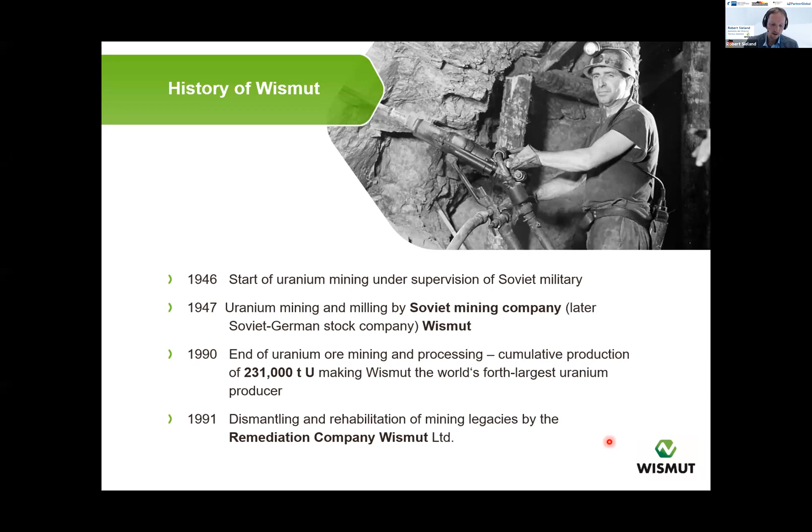Wismut produced in total 231,000 tons of uranium, which made Wismut the fourth largest uranium producer in the world. Starting in 1991, dismantling and rehabilitation of the mining legacies was carried out by the present-day remediation company Wismut. More than 40 years of mining and milling of predominantly low-grade ore affected an area of approximately 100 square kilometers in the eastern part of Germany.

And what was the price for that? The landscapes were devastated, the environment was polluted, and the infrastructure was damaged. You can see on these pictures the situation in 1991. There were altogether 5 underground mines, 1 huge open pit, and an operational area together totaling 3,700 hectares.

Beside this, more than 300 million cubic meters of waste rock from the underground mine activity was dumped on 48 waste rock dumps. The uranium ore was milled and processed in 2 large processing plants on an additional area of 75 hectares. The residuals of the processing step were disposed of in large tailings ponds. We have 7 large tailings ponds on an entire area of 570 hectares, containing about 160 million tons of radioactive contaminated sludge material.

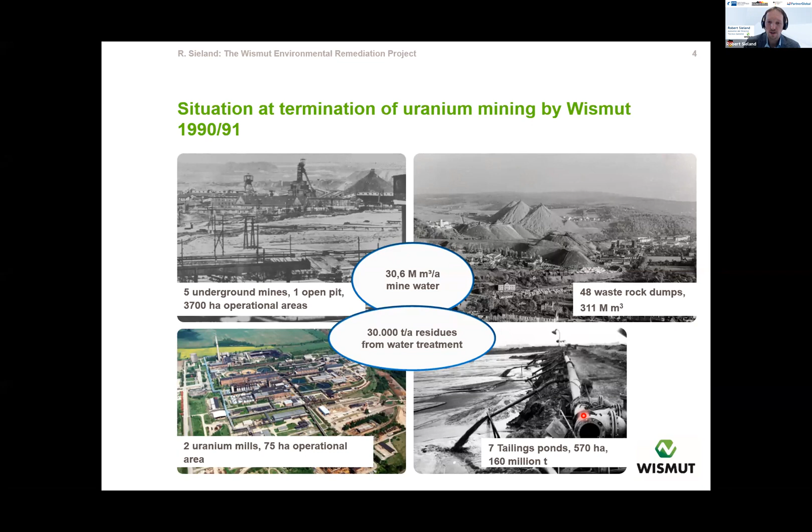In addition to these physical devastations, we had to manage about 30.6 million cubic meters of contaminated mine water each year. And from this resulted 30,000 tons of residues from the water treatment, which we had to manage.

Beside the mining sites, there were the 2 former processing plants, which are under decommission today.

So what were the main remediation goals? The first was to ensure the public safety, especially with regard to the physical and chemical stability of all remaining structures and objects.

Additionally, we need to enable a future land use after remediation, for example, for agriculture, forestry, or even for business settlements.

Very important from the environmental perspective was the aim to minimize the radiation risks and hazards, which are mainly caused by uranium, but also by radium and radon gas. We need to achieve an individual effective dose for the public of less than 1 millisievert per year. This is the reference level and also the remediation goal.

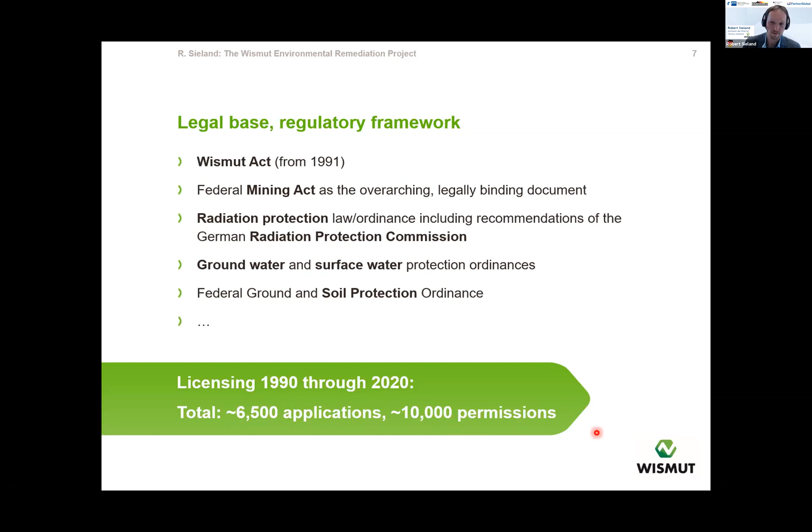Let me come to the main remedial activities after the closure of uranium mining in 1991. It comprised the full scope of remediation, among others, the dismantling of surface structures and buildings, the removal of contaminated material and the safe disposal, then the safekeeping of wastes and residues such as tailings. You can see here a picture of a tailing pond and waste rock dumps, for example, here.

A very big challenge was the refilling of the former open pit. We will hear more details from my colleague Ulf Barnekow in the next presentation. And last but not least, the flooding of underground mines was a very big challenge.

All these tasks above belong to the physical remediation activities, and all these will be finished by 2028. However, there are some additional tasks, such as water treatment, the treatment and disposal of residues, and the environmental monitoring, which belong to long-term tasks. All these tasks last at least until 2050.

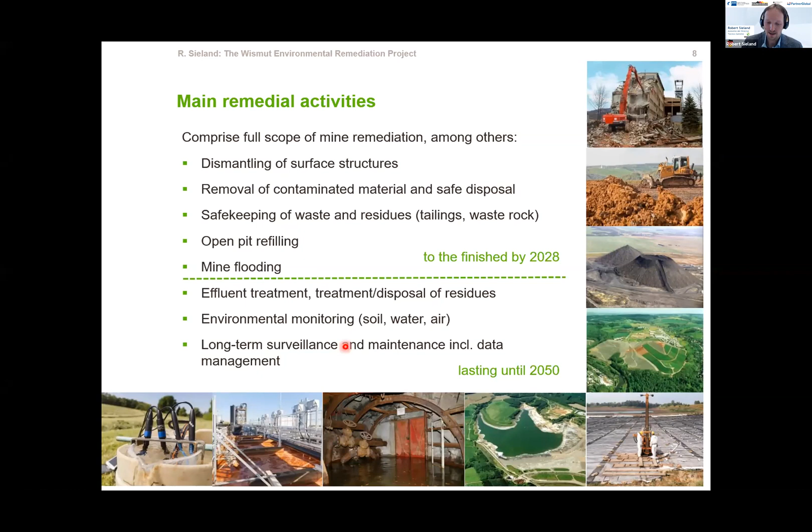So this should be a very brief overview of the entire Wismut rehabilitation project. In the second part of my presentation, I want to go in more detail with a special focus on water aspects in mine remediation.

As you can see here, water-related aspects can be classified into 3 fields of action. The first one is the characterization of the site hydrology, including the analysis and the understanding of the different chemical and hydraulic processes. It includes the determination of the amounts of contaminants and also the identification of the sources and the potential of different kinds of pollution.

In order to understand our systems on site, we need a reliable environmental monitoring. Based on the results of this monitoring, we can derive, or we can perform certain modeling and make predictions for the future development of, for example, contaminations in groundwater, surface water, or even in ponding waters.

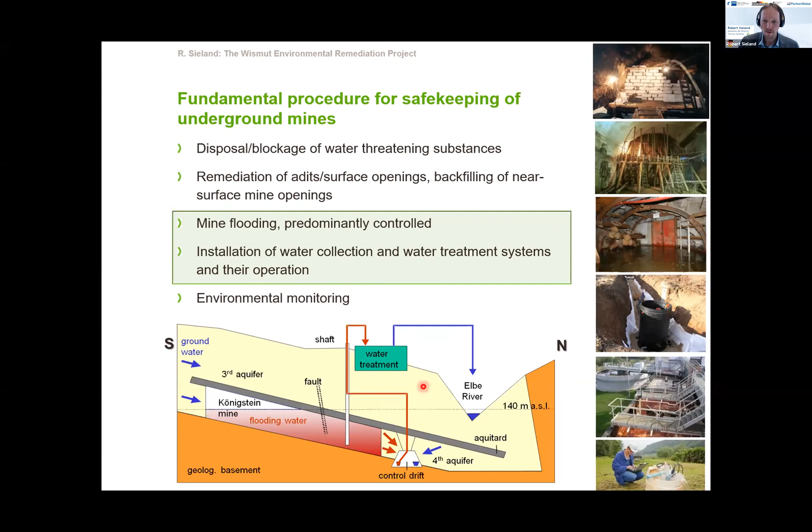Finally, we could decrease the uranium concentrations from initially 20 grams per liter to right now 10 milligrams per liter, which is much lower, but not low enough. The entire flooding process is accompanied by environmental monitoring to make sure there is no impact on other aquifers.

The second box was about different water collection systems. I would like to show you this aerial picture of our largest uranium tailings management facility.

Very high contamination occurs in the pore water, and the pore water is infiltrating or penetrating the dam and draining into a local creek. In order to avoid this seepage effect, we installed so-called protection wells in the sandy beaches of our tailings pond, where we pump out the highly contaminated pore water.

Due to this pumping, we create a depression cone, or cone of depression. Due to this depression, the hydraulic gradient, the pressure difference between inside and outside the basin, decreases, and thus the amount of seepage decreases significantly.

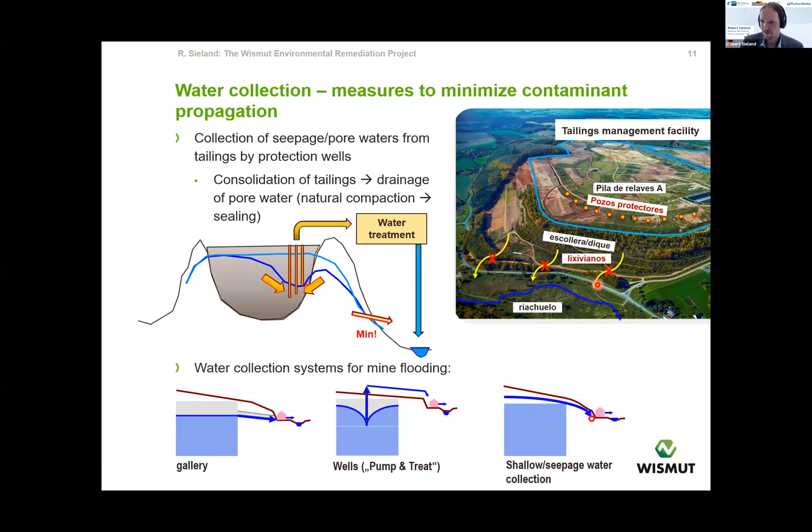So all the water we collect, we need to treat, of course. Actually, we have 6 treatment facilities in operation, with capacities between 200 and 1,500 cubic meters per hour. Last year, we treated a total annual volume of about 11.7 million cubic meters of mine water.

So you can imagine how many chemicals you need to add for the cleaning process. The main technology we apply is modified lime precipitation. This means pollutants such as metals and arsenic will be precipitated in iron hydroxide sludges.

At one of our treatment facilities, we also use ion exchange technology in order to separate uranium. After cleaning the water, the remaining sludge needs to be separated from the clean water, dried or dewatered as far as possible, and stabilized for long-term storage.

In 2020, we had to manage about 12,000 cubic meters of sludge or precipitates from our water treatment plants.

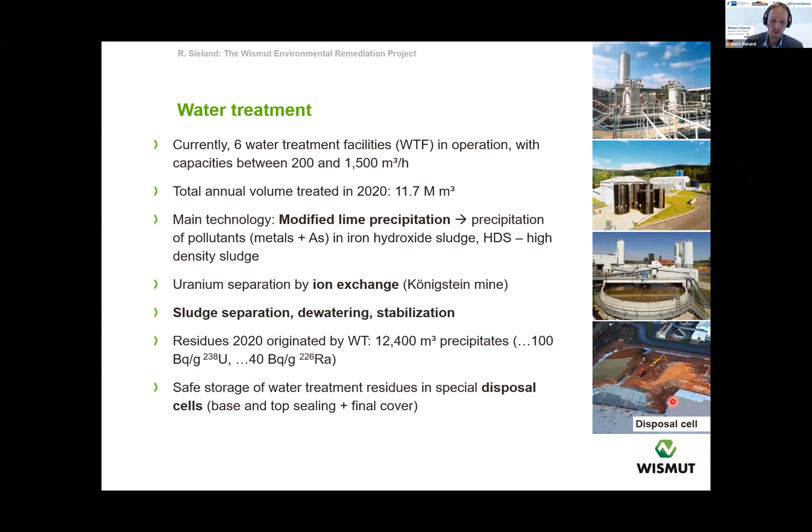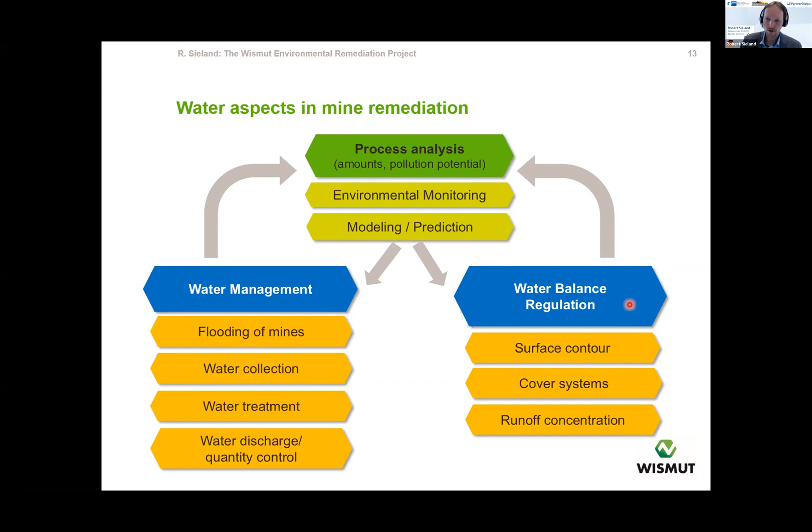So the first step in remediation was the removal and treatment of this free ponding water, and also of the pore water of the sludge.

The second step was very difficult because it was not possible to simply move technical machines onto the tailings, because the sludge was extremely weak and unstable due to water contents up to 95%.

That's why we started to place an interim cover on the surface of the tailings, starting from the outer rim of the pond and moving forward to the center of the basin. This interim cover consists of so-called geotextiles and geogrids, on which we placed a 1-meter-thick soil layer to provide a consolidation load on the tailings.

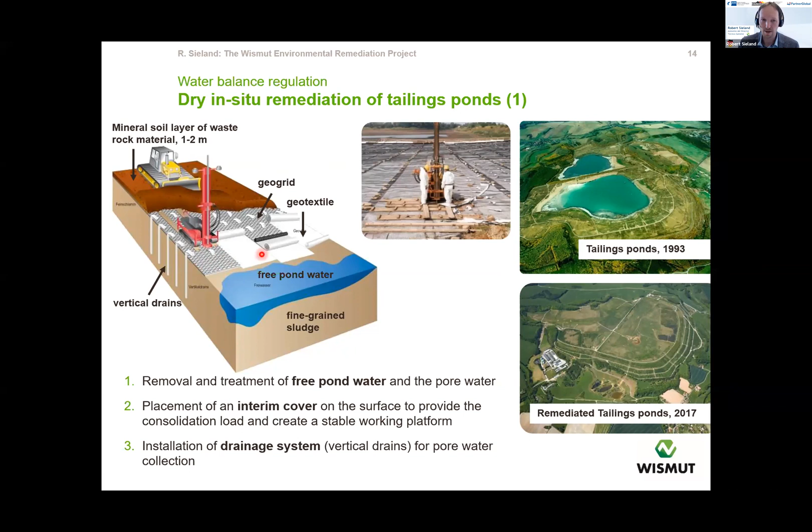The next step after installation of the drains was the construction of a stable surface contour, reshaping the landscape. Because we want to avoid infiltration of rainwater, we needed to remove the former basin structure and replace it with a spherical surface consisting of little hills and little valleys.

In some regions or areas of our tailings ponds, this contour layer had a thickness of up to 15 meters of soil material that we had to add to the site.

Last but not least, the entire area was covered by a final cover system. This was to minimize infiltration and thus reduce contaminant release into the groundwater.

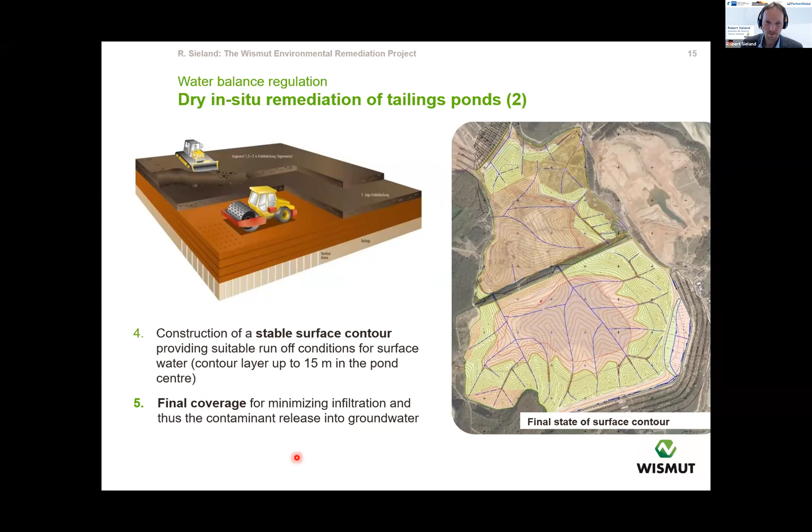So, some general words on the cover systems. They serve as safe long-term storage of waste rocks and tailings material on site, so we do not need to remove the material to another location. The aim is always to minimize contaminant release into ground and surface waters by reducing seepage.

The cover systems have to achieve the following functionality: they need to assure reduced radon and gamma exposure, especially in case of waste rock dumps. They should prevent wind-blown radioactive dust distribution, enable revegetation either as forest or meadow, and also provide a barrier against any misuse by people.

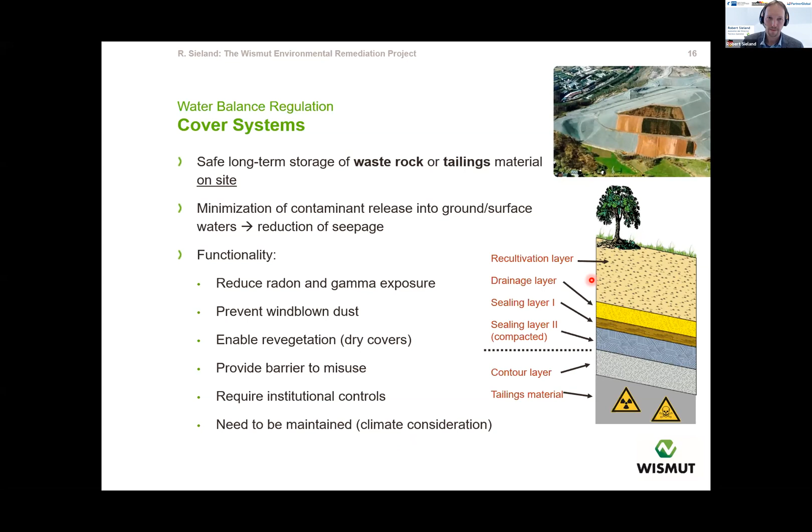The next slide is only a very brief overview of our environmental monitoring of the water pathway. I don't want to go into detail, but we have 1,400 monitoring points for ground water, surface water, seepage, and also processing water. All these samples were analyzed for their chemical composition, radionuclides, non-radioactive parameters, etc.

But we also make geomechanical investigations of soil samples with regard to water content, porosity, or permeability.

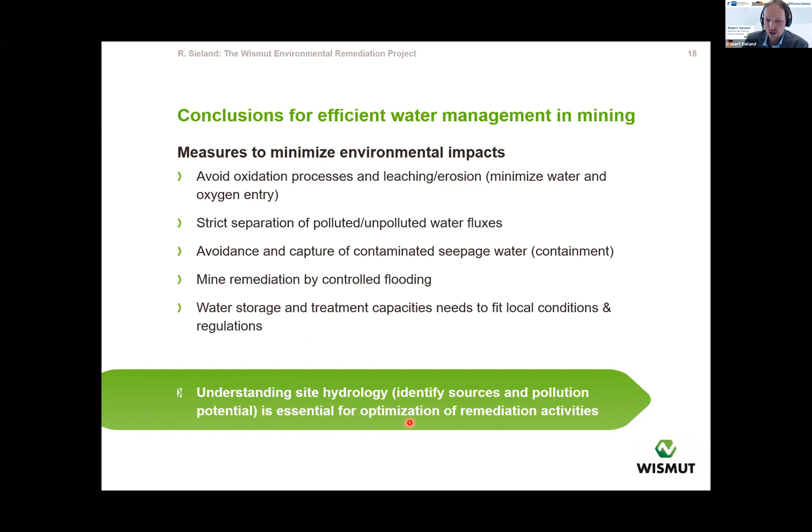And of course the water storage and treatment capacities are strongly dependent on your local conditions, your climate conditions, and of course also on your regulatory requirements. So what I can say is that understanding the site hydrology, meaning identifying the sources of pollution and the potential, is essential for the optimization of the remediation activities.

And with this I come to the last slide of my presentation. I try to give you some lessons learned with an overall view of our Wismut activity. The first point is you have to consider the life cycle approach. It means plan how to minimize environmental impacts before you start mining, not after. Try to avoid the mistakes which have been made in Germany in former times.

Regulations imposed by authorities on the mine operators need to be defined, or you have to define the final state conditions with the regulation. Because if there are no limit values or target values, it's hard to plan any remediation activity.

In this context, the tightening of regulatory limits can enhance the treatment effort, because the lower the limit values you have to reach, the higher the technical effort to clean your water, and you would like to save money, let's say. The aim of remediation is to achieve natural and stable systems

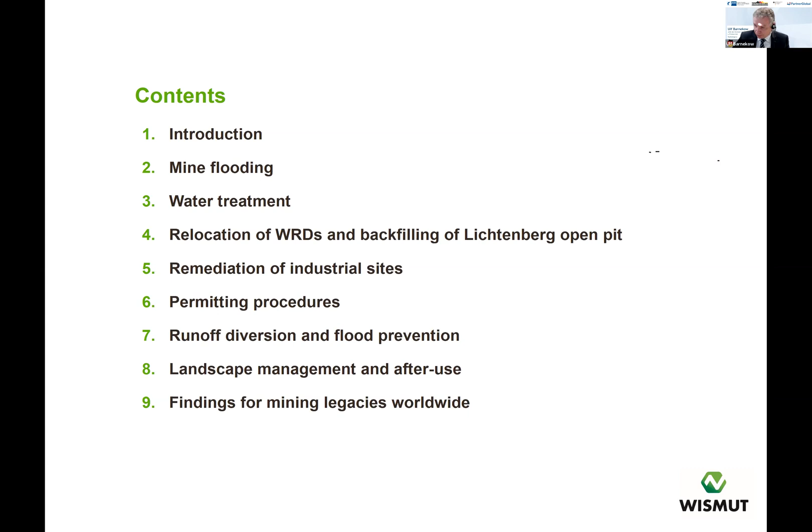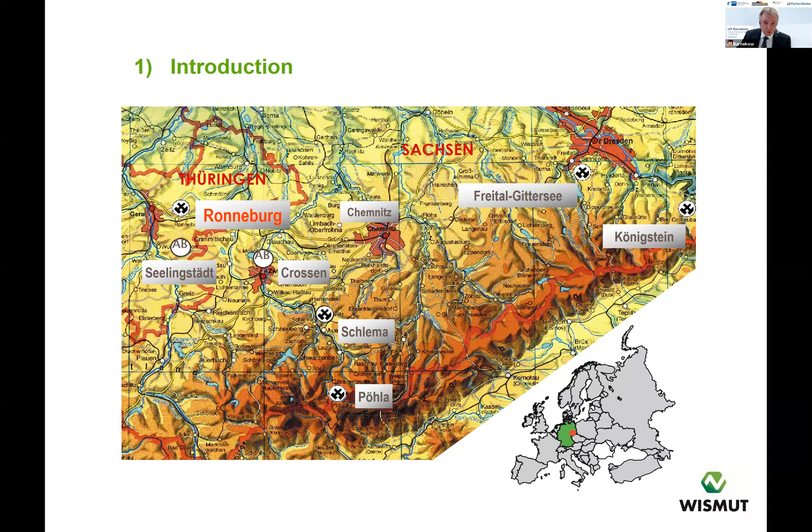So this gives you an impression. In 1990, the Ronneburg mining area was the largest mining area of Wismut. About 50% of the uranium was mined here.

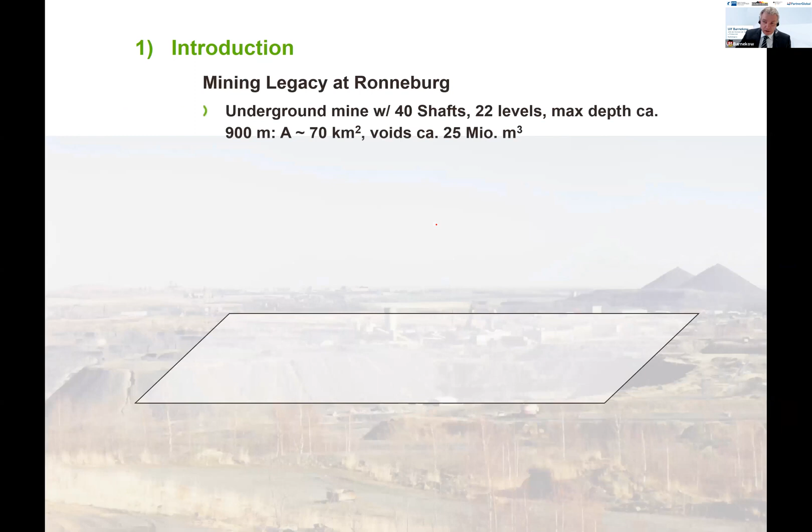Okay, and to give some, can you see it? Hello, can you see the mine? Yes, now it works. Okay, now it works.

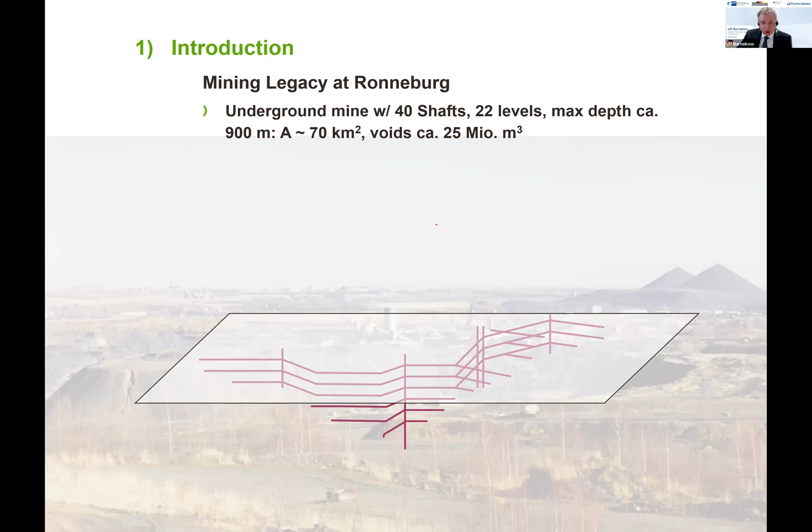It works, yeah, okay. So there's a mining legacy at Ronneburg with about 40 shafts, 22 levels in the underground. The maximum depth is about 900 meters below the level of 300 meters above sea level. The area is 70 square kilometers, and the open voids are 25 million cubic meters.

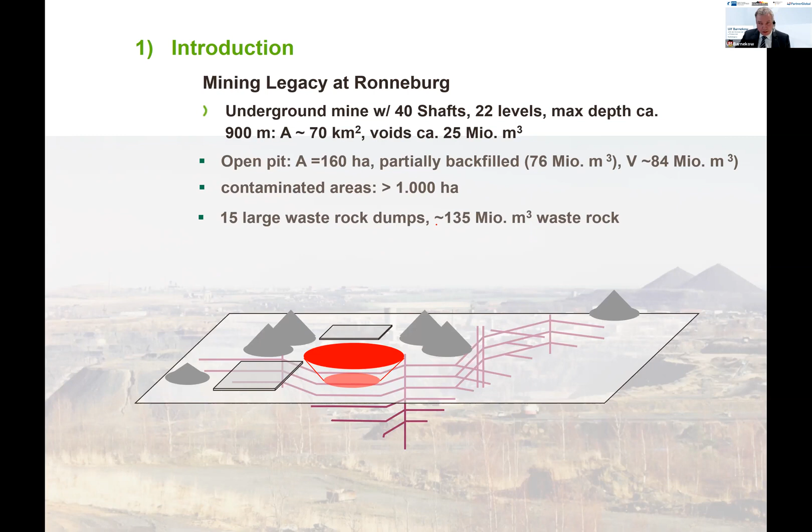You see here the open pit Lichtenberg. It stitches into the mine and is connected to the underground mine. It's about 160 hectares, and in 1990, about 50% of the pit was already backfilled. The contaminated area was about 10 square kilometers. We had some 15 large waste rock dumps from the shafts and about 135 million cubic meters of waste rock.

And so there were some environmental problems. One is, of course, from the mining itself, the radon from the ventilation shafts, the dust from the open, air-exposed surfaces, and of course the water was contaminated. We had some massive emissions of about 8 tons of uranium per year into the receiving streams. Here on the right-hand side, this is the north, this is the south. There are two receiving streams here, two creeks, and another one here.

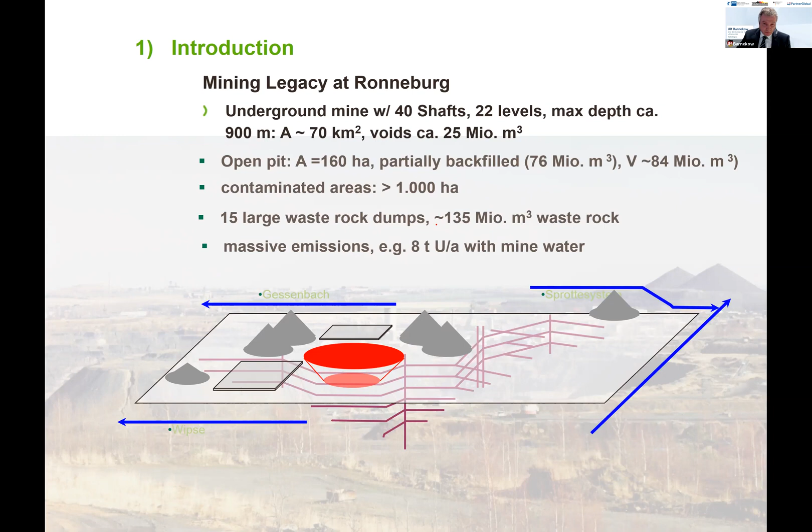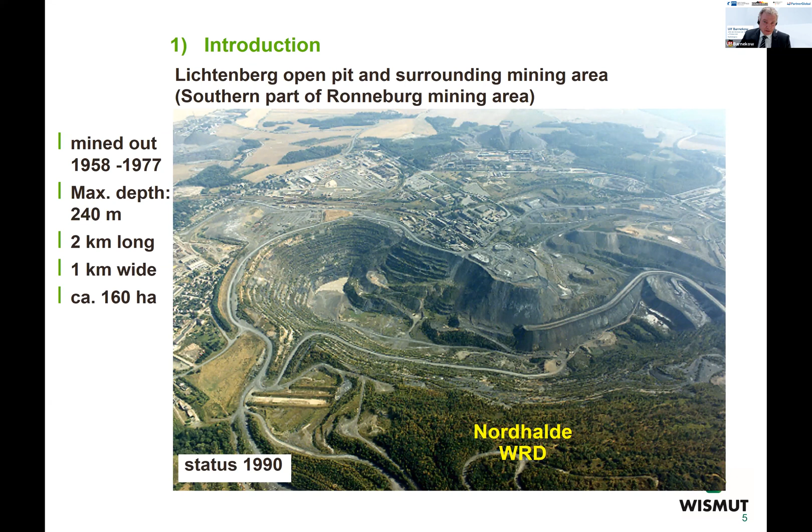The mine - okay, to have an impression, this is the situation in 1990. You see here on the left-hand side, this is the city of Ronneburg, immediately next to the slope of the open pit. The pit was about 240 meters deep, 2 kilometers long, 1 kilometer wide. You see all these facilities here of the mines, the conical piles here. There were other piles here. So this is a large pile from the open pit here in front of us. So this was the situation at that time.

The minefield itself - there were underground minefields. You see them here. This is highway number 4. We separate between the southern minefield and the northern minefields. There are 3 minefields in the north, and they are hydraulically separated from the southern part of the mine. This is the location of the open pit Lichtenberg, and this is the city of Ronneburg.

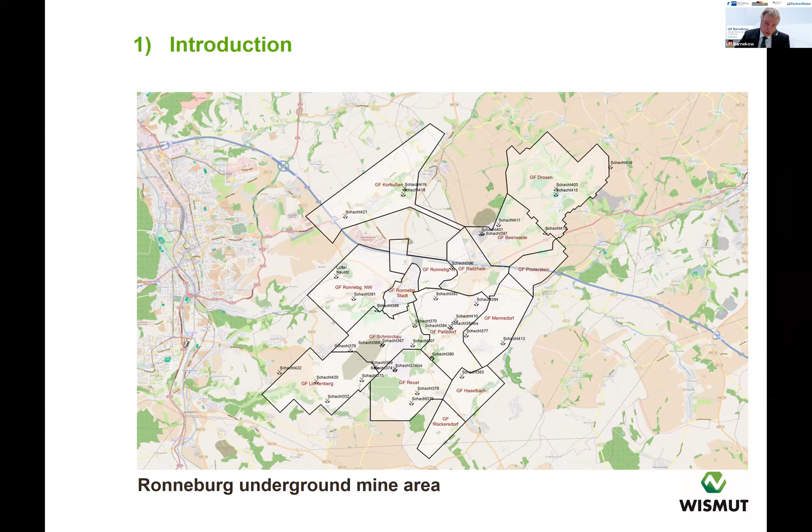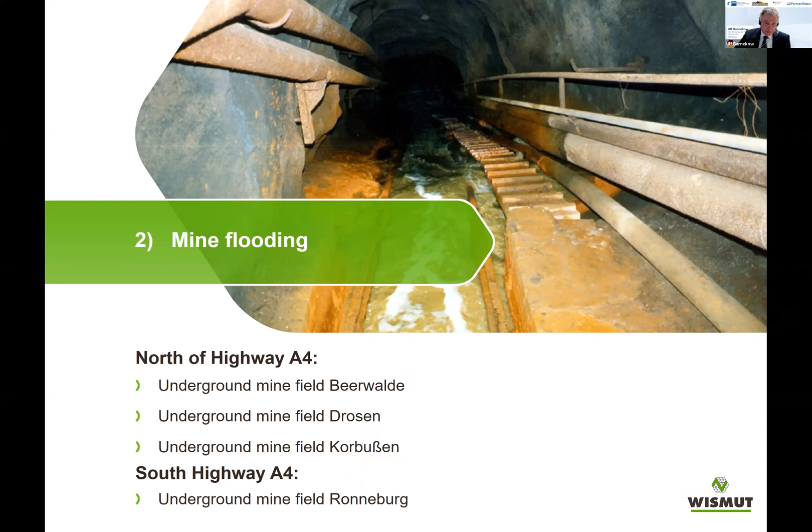So the flooding strategy, after securing the uppermost levels against subsidence and securing the surface, and also after clogging the boreholes, the long-term goal was to achieve a water quality allowing discharge into the receiving streams without water treatment. The midterm goal is to reduce water treatment costs. For the next years, we have to control the mine water table within a certain range to use temporary storage capacity when needed, with respect to water quality control in the receiving creeks, especially the main receiving creek, the Weiße Elster River, because we have another mining area in the south which also affects this main receiving stream for chemical reasons.

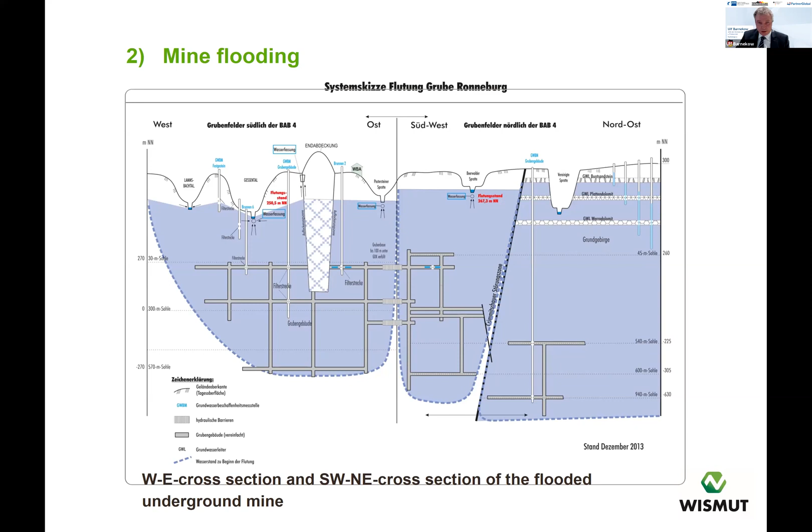So therefore the idea is to get a high water table. Let me go back to the transparency before. This is the outflow point, the Gessen Creek Valley of this mining area, and there we have a horizontal drainage. We also have a pumping well here into the mine, and another second pumping well over here in order to have, for safety reasons, a second possibility to control the mine water table.

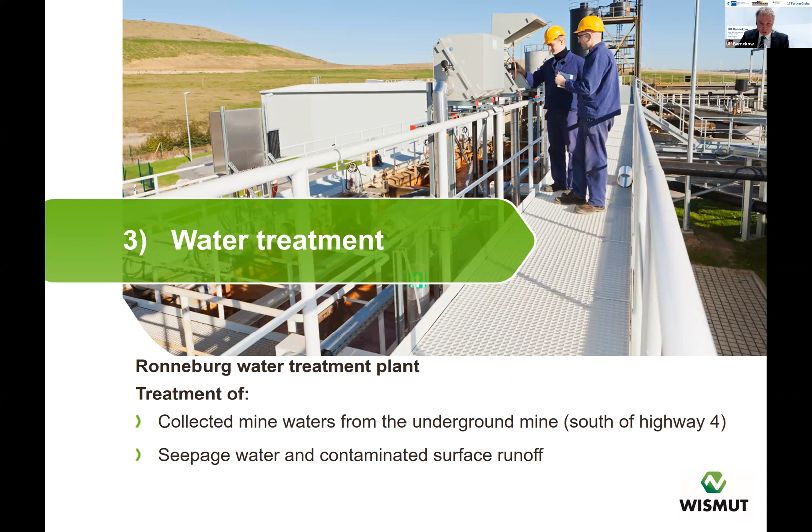So this is the flooding strategy. Water treatment, of course, the water has to be treated. The collected mine waters from the underground mine and also contaminated seepage from surfaces that are contaminated, for example from the waste rock dumps or from their subsurface. The water treatment plant today was erected in 2001 with a life period of minimum 25 years.

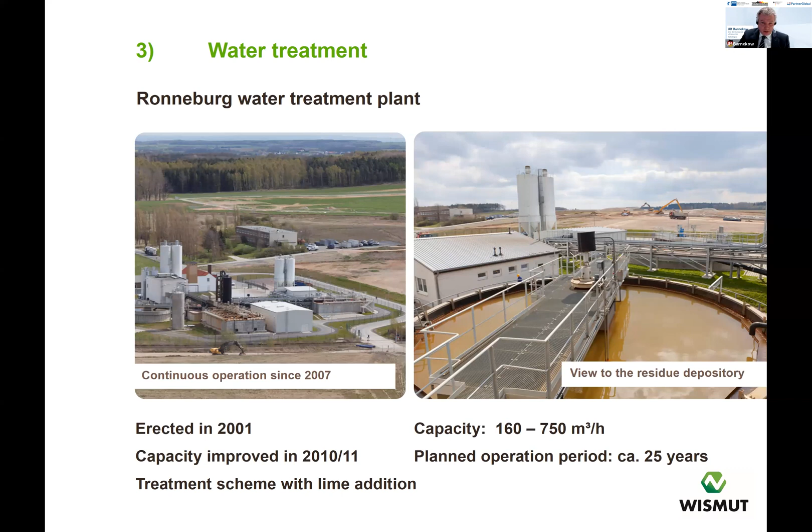It was renovated in 2010-11 and just a few months ago as well. This is a classic treatment scheme with lime addition, so we don't treat salts, we only treat heavy metals. I'll show this a little bit later.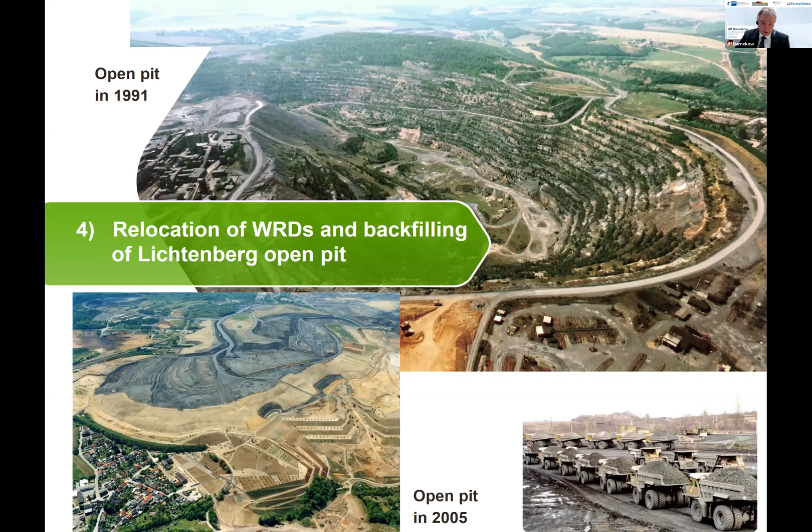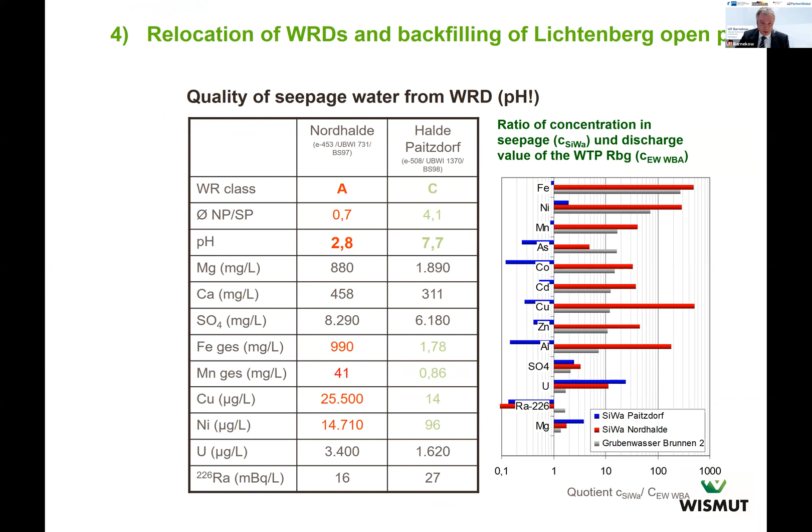The quality of the seepage water from the waste rocks was also different. We had acid-producing material, and we also had a neutral drainage. Both could have significant uranium, but in the acid mine drainage we also find nickel and other metals. So this water cannot, or has to be, treated before being discharged.

The waste rock management, the remediation of the Ronneburg mining area, was a joint remediation of the waste rock dumps together with the open pit Lichtenberg. We had to care for the different chemical compositions of the material, so therefore we decided to remove all these waste rock dumps into the open pit. And all the waste rock dumps north of the highway, we couldn't transport across the highway. This was quite a problem.

So therefore we created a new waste rock dump over here where we put everything together north of the highway.

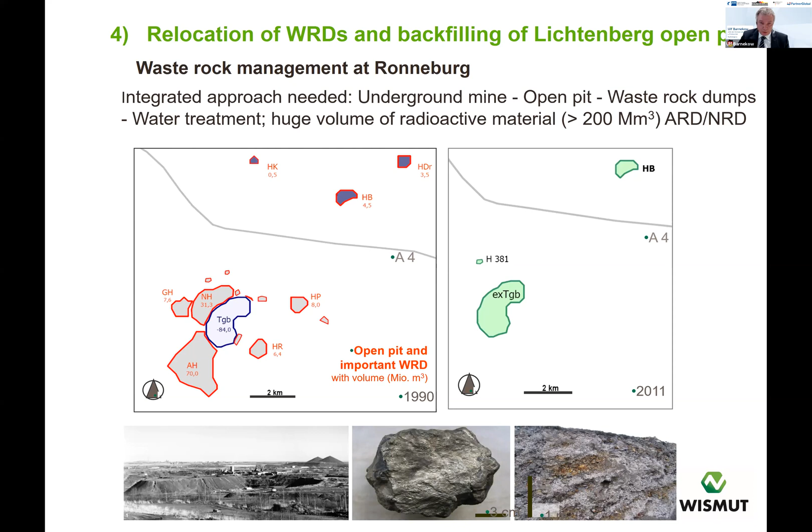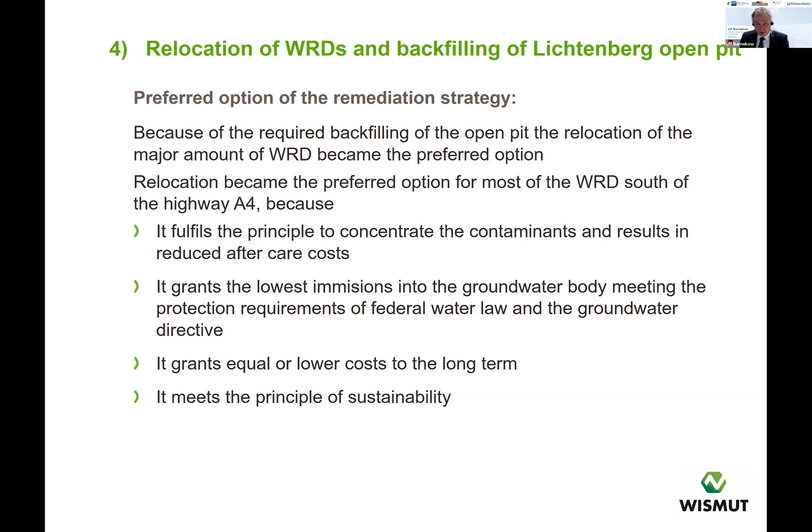For this, we had to investigate the chemical composition of the waste rock dump material, and we classified it into 3 different types: the so-called acid-producing material, the red one; a less acid-producing material, the yellow one; and the neutral material, the uppermost one. Then we put the most acid-producing material at a level below the future groundwater table in order to reduce oxidation, and the red material was also added with lime.

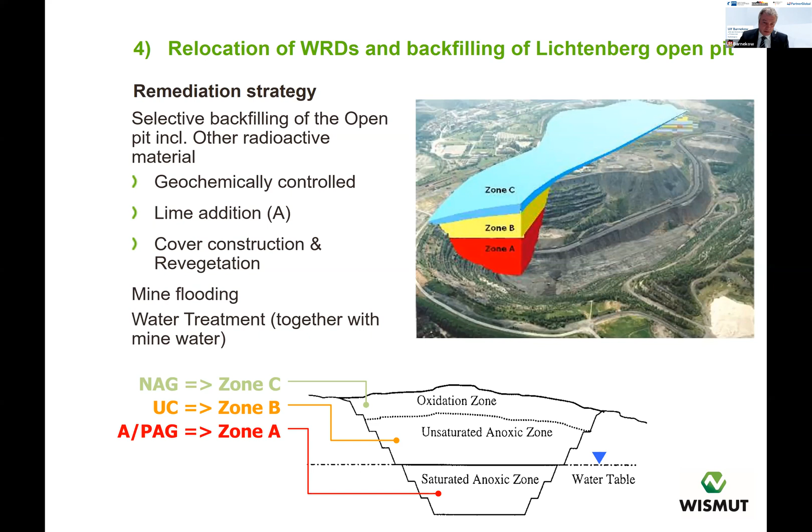You see in the next... does it work? Yes. Here you see the operational procedure, with the different zones A, B, and C. So it was classified excavation and placement in the open pit. The layers were compacted, and we added lime on top in thin layers with a big dozer. Then we compacted layer-wise, beginning with 60 centimeter layers, later 90 centimeter layers, and added lime in there.

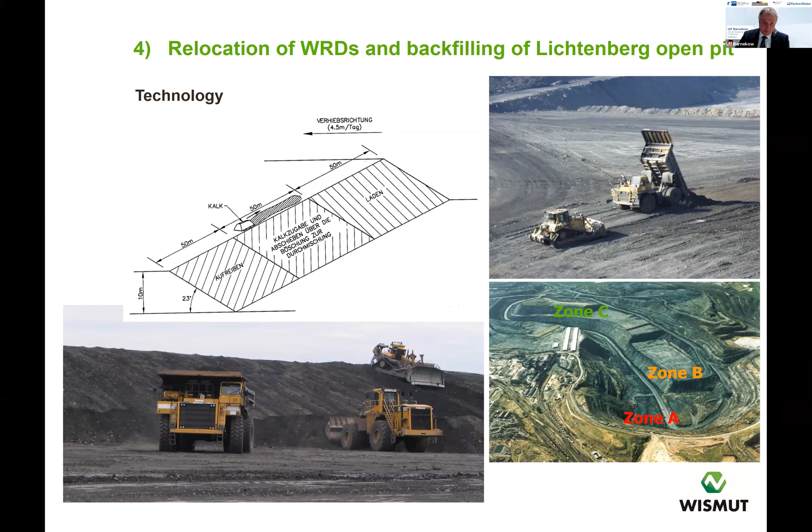You must imagine that this backfill body is directly connected with the underground mine. We had tunnels that were connected directly to the open pit. The reason for starting the pit was the high marcasite and pyrite content and the organic matter that led to burning, to fires in the mine with burning material. Also the waste rock dumps were very hot, with up to several hundred degrees Celsius in some parts.

So in the southern part of the Ronneburg area, all this material was put into the open pit. In the northern part, we concentrated it in the Beerwalde waste rock dump. After placing the material there, we have to reshape the slope for long-term stability, cover it with mineral soil, and establish vegetation to avoid erosion.

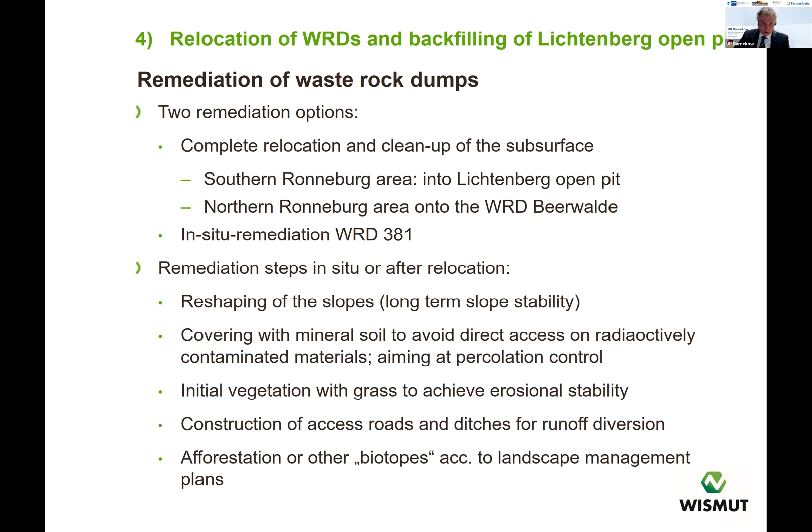Together with the backfill of the open pit, we had co-disposal of other materials from different types of remediation work. Total amount about 4 million cubic meters of contaminated debris, scrap metal, contaminated soil, sludges from settling ponds, demolition materials, excavated material from industrial areas and footprint areas of relocated dumps, and landfill material.

There were landfills in the waste rock dumps, and we needed specific compaction measures to get the permit to put it into the open pit. We treated some organic soils contaminated with hydrocarbons in a biological treatment plant. And we had about 1.2 million cubic meters of contaminated ashes from lignite burning, which was used for water treatment during the operational phase.

At last we also constructed a waste depository for residues from the Ronneburg water treatment plant inside the open pit, and covered it as well, together with the complete remediation.

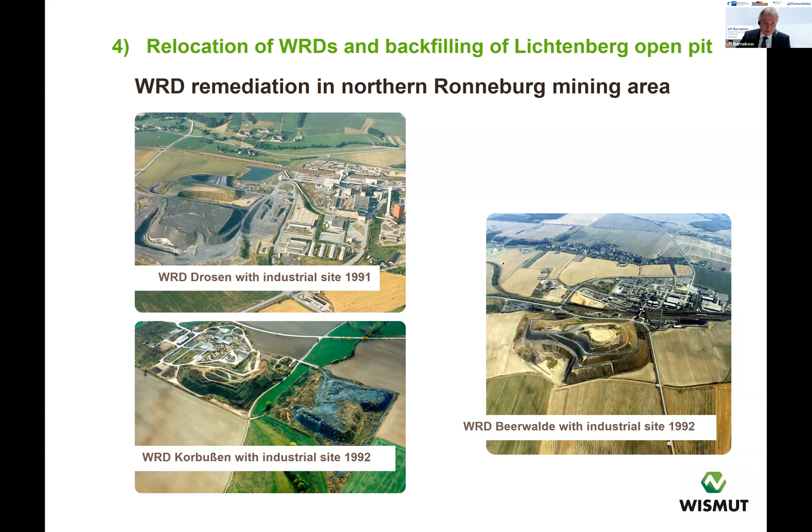These are some impressions about the three sites north of highway number 4, showing the situation in 1991. You see the industrial sites, the waste rock dumps, and the shafts. The next slide shows the situation in 2013.

At that time, all the material was relocated to the Beerwalde waste rock dump. We placed a soil cover consisting of two layers on top of this waste rock dump to reduce the infiltration rate to no more than 5% of the annual precipitation. The annual precipitation rate is about 750 millimeters, and the infiltration rate is about 120 millimeters. Due to the tight sealing layer at the lower part of this two-layer cover system, we further reduce the infiltration here.

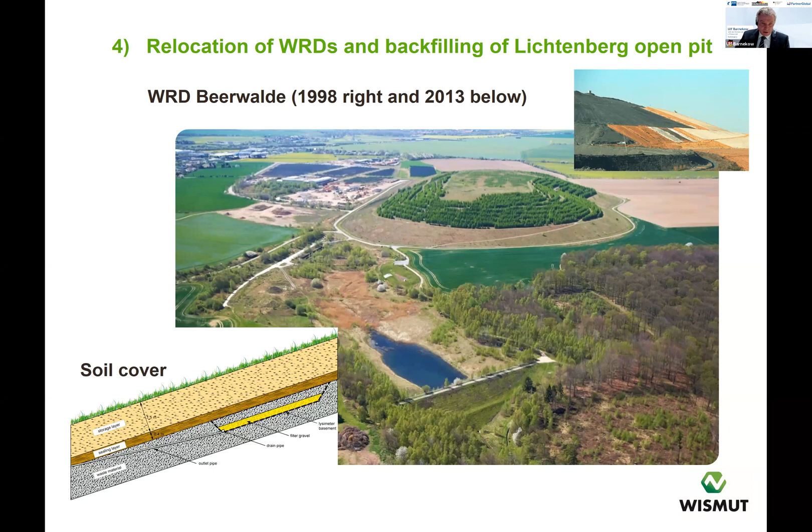For industrial sites, remediation involves dismantling and demolition with respect to radiological safety. This is also of specific importance for milling sites and processing plants. We sorted different types of waste for separate disposal and recycled steel where possible.

Radioactively contaminated waste rock materials, soils, and other such materials were relocated into the open pit, if needed with special compaction measures. Uncontaminated materials were recycled. Mixed contaminated soils with radioactive and/or hydrocarbon contaminations were treated in the biological treatment plant, or they were disposed in the hazardous waste depository Lichtenberg, about 1 million cubic meters of material. So we also constructed such a waste depository there.

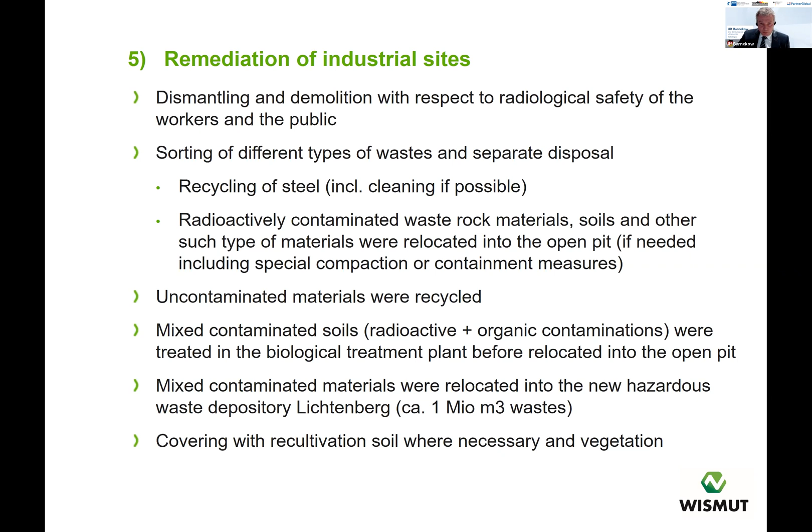In the end, everything is covered and recultivated with recultivation soil, and where necessary, vegetation is established for erosion control. The permitting procedures will maybe be explained in more detail by Peter Schmidt, especially regarding the radioactive aspects.

According to mining law, we needed an operational closure plan, and this was permitted. For each individual measure within the remediation, we needed individual closure operational plans. Under water law, we needed a permit to use the waste rock and to put it into the open pit. According to radiation protection law, I think this will be explained by Peter Schmidt in much more detail, so if needed we come back there later.

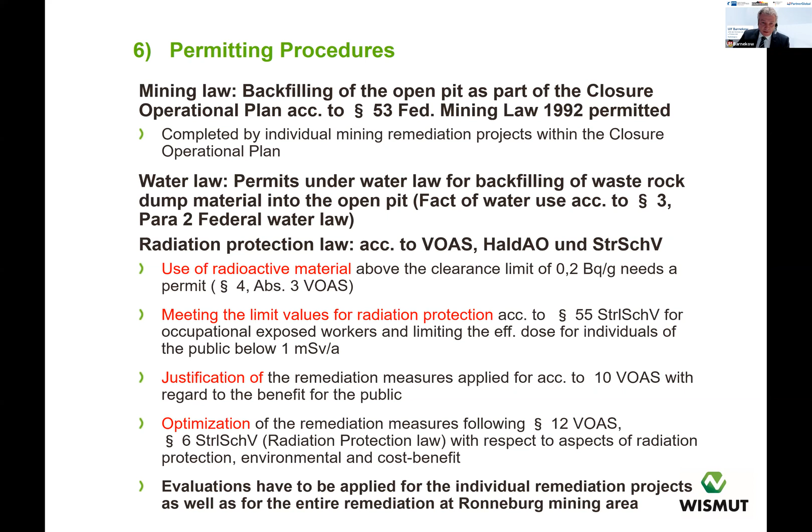Regarding the radioactive effects, during the ongoing operational period, the people living in the surrounding area were affected by dust, by the lorries, by dirt from the activities, by radon from ventilation shafts, and the water was also a big problem. At that time the main problems were the quality of water regarding the industry production in the downstream area.

The main permitting procedure for the open pit required a planning approval procedure to construct the final contour, place a cover, and vegetate it. We had preparations for after-use of the areas, including landscaping, and we needed to catch the surface runoff and divert the water to the receiving streams, including flood prevention measures.

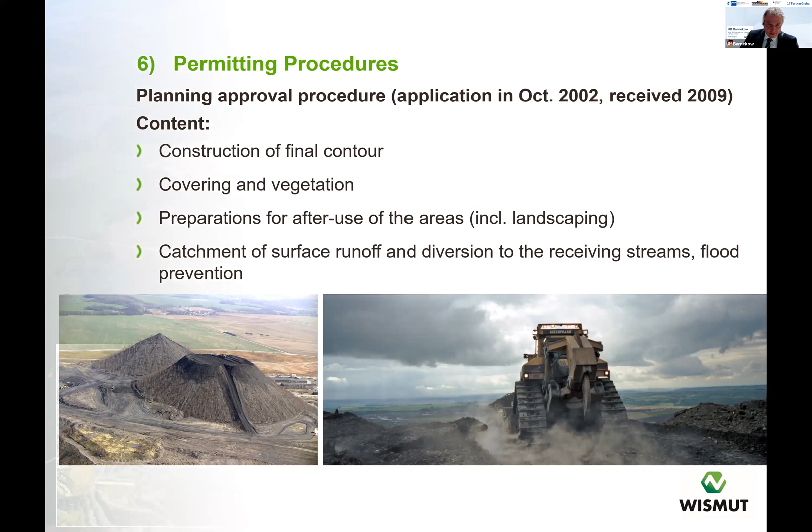This shows the situation in 2009, and here is the main receiving stream. This is the deepest point, 240 meters above sea level. The highest point is 370 meters above sea level, with an average level of 300 meters above sea level. Here is the main outflow point of the mine. Here's well number 6, well number 2, and the water treatment plant.

You see the subsurface of the former waste rock dumps, and here we constructed a runoff retention pond in order to prevent flooding of the city from the runoff. So this open pit here is now this, and all the waste rock dumps in the surrounding area are now inside the open pit.

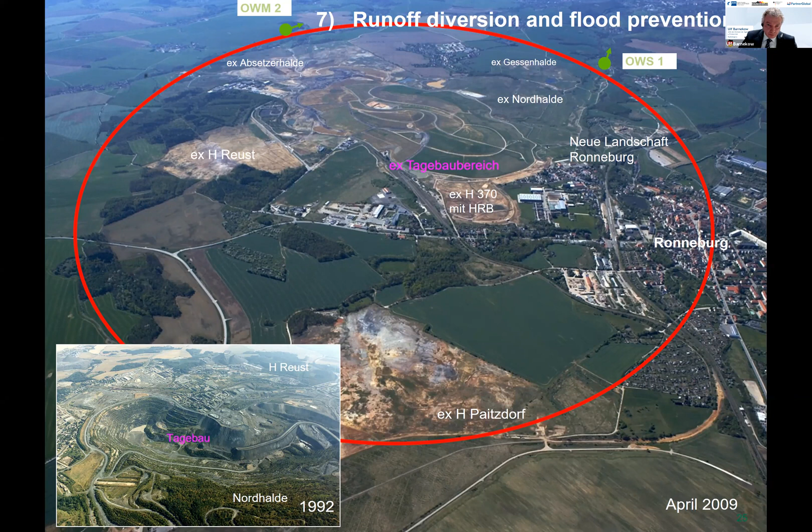The surface, there were landscape management plans for the surface. Mr. Barnekow, you should come to an end. Yes, okay, I'm finished in 2 minutes.

Long-term tasks after remediation include maintenance and repair of covers, roads, ditches, and needed facilities, and management of the sites: collection and treatment of decant mine water and of contaminant seepage. Maintenance of open underground mine workings is not relevant in Ronneburg anymore. We need environmental monitoring, we need to secure the surface, and we need documentation and knowledge management.

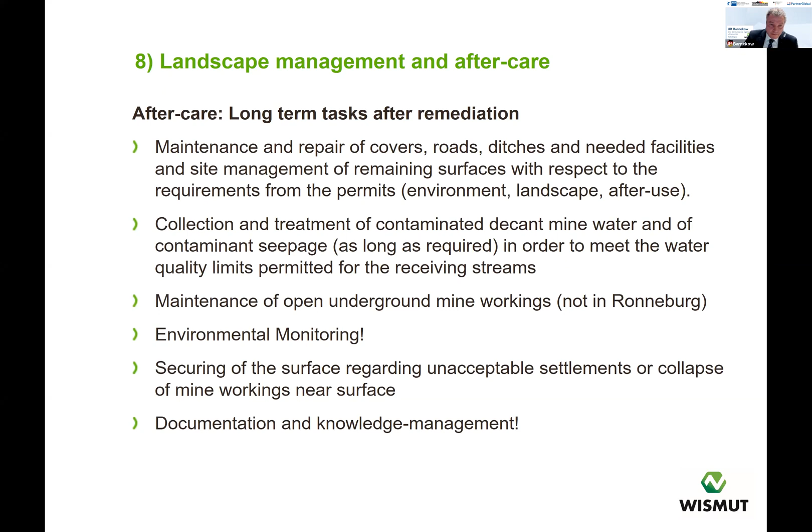My last findings for mining legacies worldwide: prepare overall mining projects as well as individual mining operational plans with respect to mine closure works and costs at any time. For this, proper conceptual site models are needed for planning, and appropriate risk assessment and management is needed. Involve affected stakeholders. Reduce the need for remediation during and after the operational phase through proper planning, steering, and documentation of operations and remediation. Care for implementation of proper monitoring and control regimes, both by the operator and by the responsible authorities, with clearly defined responsibilities of all involved parties.

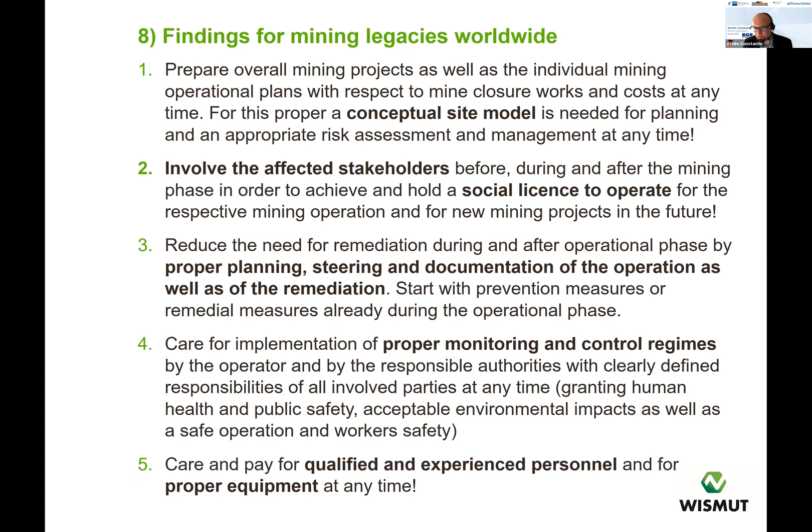The overall remediation costs were fixed in 1990 by law to be about 6.7 billion euros. Today we are, I think, at a limit of about 8 billion euros. The annual budget of Wismut is about 120 million euros. We have about 800 people working with Wismut, about half of them are workers. The remediation of the Ronneburg site is maybe in total around 2 billion euros. So it's a really large amount.

You must imagine this as, let's say, collateral damage from the Second World War. This area came under Russian control, and the people had no chance — they were just removed, and then the mining started there. So it was a measure to keep the people still there, not to leave everyone out of the area. It's densely settled, and it has to be developed again. There was a period in 1990 when the money was there to make this decision.

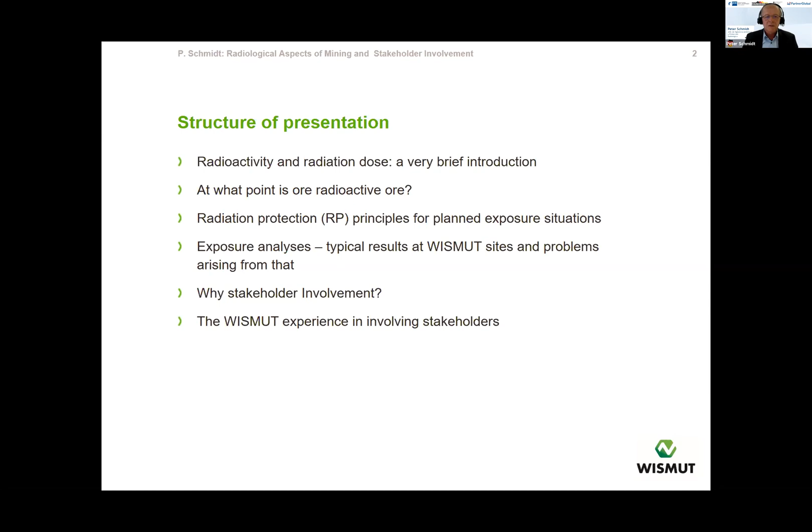So a very, very brief introduction of what radioactivity is. Perhaps you know that we have radioactivity, natural radioactivity everywhere around us. We have it in the soil, we have it in air, we have it in the wall, in the ceiling, everywhere. And this is because some of the radionuclides have a very long half-time and they decay very slowly. And one of these elements is uranium.

Here we see the uranium decay chain with a number of daughter nuclides, which again decay, and we see a very important nuclide. This is the radium, because by the decay of radium, radon is built. Radon again is a noble gas, and it's very important with respect to exposure at mining sites.

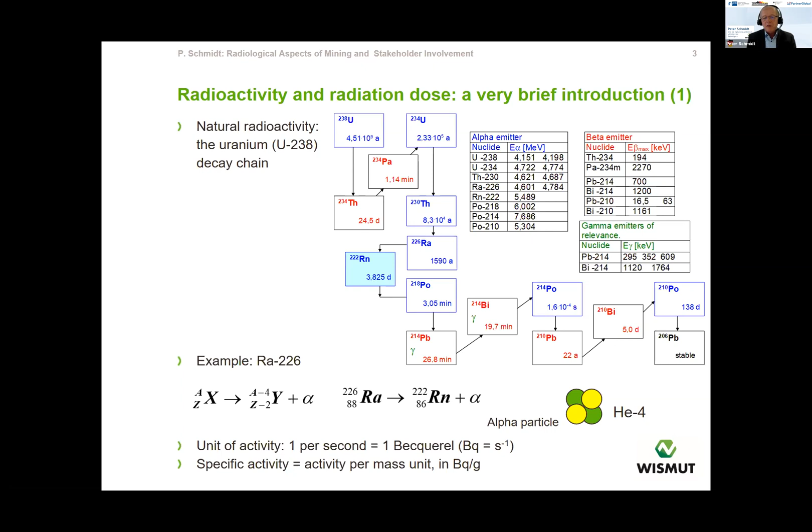The unit of activity is 1 per second. It's also called 1 becquerel. Becquerel, a French scientist who discovered radioactivity in 1896 already. And when we relate the activity to a mass unit, then we speak about the specific activity given in units of becquerel per gram. So radioactivity and radiation can build doses in the human body.

We have two options. The first is the exposure by external radiation. This is gamma radiation and electromagnetic wave radiation, comparable with cosmic radiation, or also comparable with the X-rays we receive during medical investigations. This electromagnetic wave penetrates into our body and gives energy to the body, and by this radiation dose is built.

The other option is that radioactivity is incorporated by inhalation or by ingestion. These are mainly particles onto which the radionuclides are bound. I mentioned already the noble gas radon, which may be inhaled, but this radon has also very dangerous daughter nuclides, which create high doses, in particular in the lung, and may cause lung cancer.

With the goal to compare different kinds of interactions of radiation, the effective dose was defined. The effective dose allows us to compare different radiation and their interaction with the human tissue, and is a measure for the radiation risk. The unit of the effective dose is sievert. Sievert, this was a Swedish radiologist, biologist also, but normally we use the unit millisievert. This is 1,000th of the sievert, because millisievert is a level which we normally observe in nature.

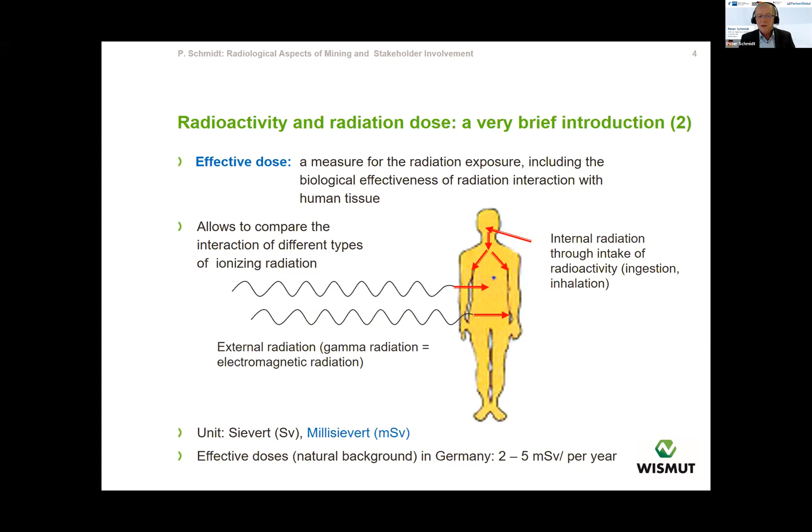But once more, please have in mind the following: 2 to 5 millisievert is a good number for the natural radiation background. And then, of course, the question comes up: at what point is ore radioactive ore?

We have radioactivity everywhere, and we have uranium in the Earth's crust as an element. The mean concentration in the Earth's crust is 3 to 4 ppm, parts per million. Just to give you an idea, if you have an area 1 kilometer by 1 kilometer and only 30 centimeters in depth, this soil layer contains 1.5 tons of uranium. I guess nobody would expect that.

Then we can transfer ppm uranium into the unit of activity. 1 ppm uranium is equal to 12.3 millibecquerel per gram uranium-238. Now, the International Atomic Energy Agency, and I guess Peru is also a member of the IAEA, has defined as a clearance level for each radionuclide in the uranium and thorium decay chain, the value of 1 becquerel per gram.

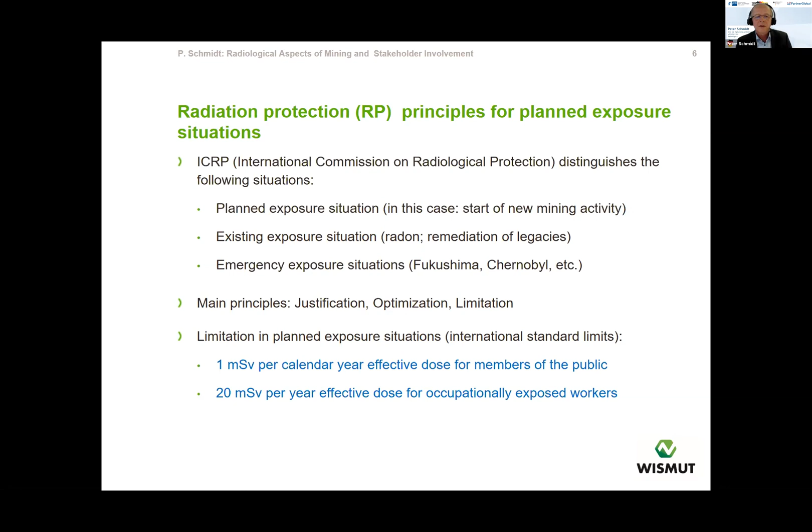And there is another number one has to know: this is 20 millisievert per year effective dose for occupationally exposed workers. So in other words, when you plan to open a new mining activity, and the ore has more than 80 ppm uranium, then you need to apply the national regulations for radiation protection and for NORM.

I do not know how these regulations are developed in your country, but I'm pretty sure you have something in this regard. You have to perform environmental impact assessment. You have to monitor the exposure of workers. You have to develop and conduct environmental monitoring. I myself am responsible for monitoring in my company.

Back to the questions from before - yes, we have permanent monitoring at the sites, including at the moment 1,200 groundwater investigation wells, 300 points where we investigate surface waters, and 350 points where we investigate the quality of air. This monitoring is done by Wismut, but it is also approved by the authorities.

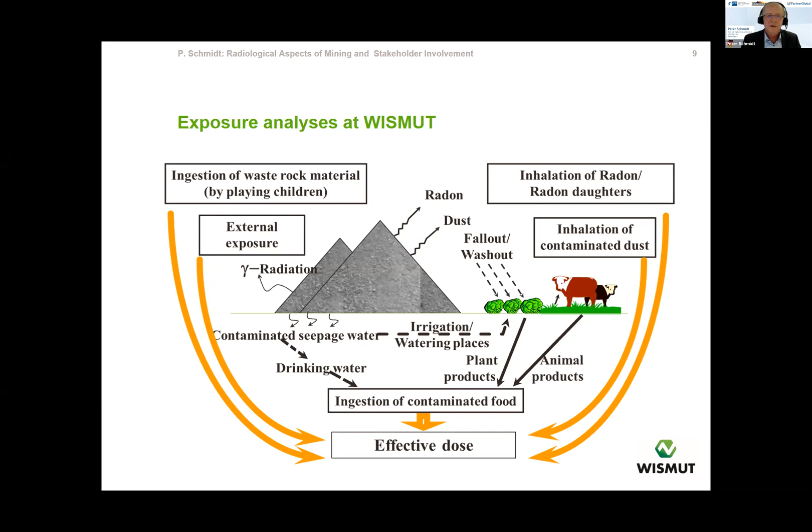For work on the surface, the doses are rather low, so our workers receive, as a rule, 1 millisievert, not more. Again, this is very low in comparison to the 20 millisievert limit for workers.

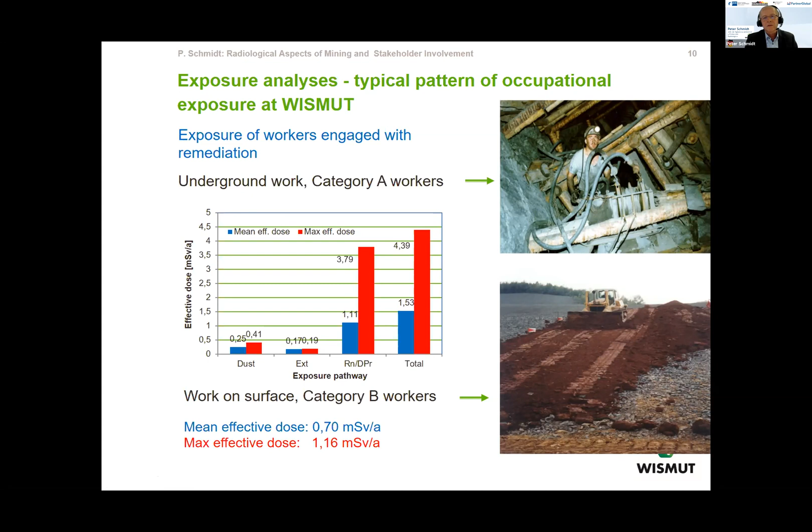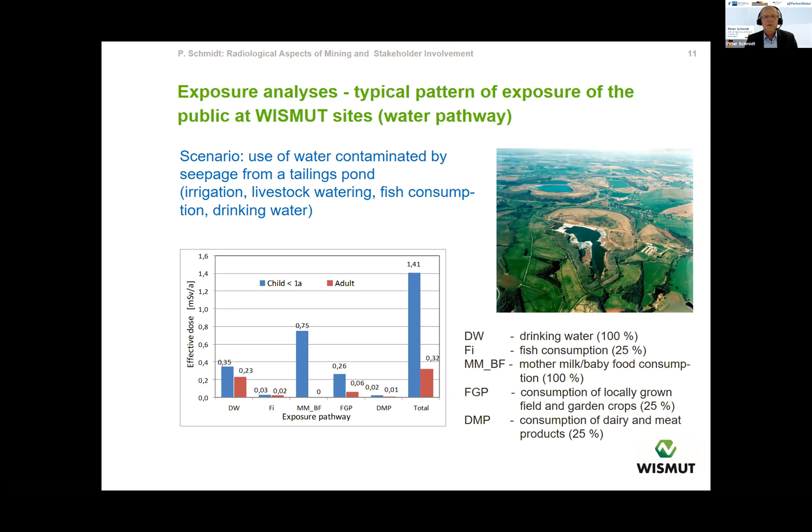Exposure of the local public: this is a picture showing two tailings ponds, and between these ponds we have a small river, in which we measure radium, uranium, lead, polonium and other radionuclides. We perform the exposure analysis here, and what we find is that for the child the dose can be higher than 1 millisievert per year, for the very conservative scenario that the water is used as drinking water for babies and also for the preparation of baby food. This is, of course, conservative, but we have to consider it according to regulations and guidelines for performing exposure analysis which exist in Germany.

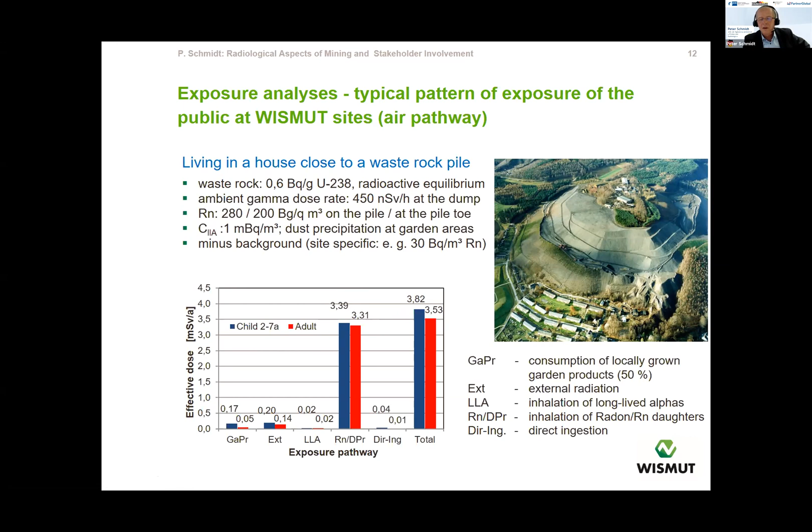A very short excursion into the question of stakeholder involvement. I remember, 12 years ago, I was invited by the IAEA to participate in a workshop in Argentina with a lot of participants from Latin America. We discussed how to include stakeholders, because you cannot carry out any mining activity now, you cannot open a new mine, without involving those who have a clear interest that their concerns are properly considered. So stakeholders are operators, regulators, the local public, municipalities, donors, etc.

Our strategy at Wismut was always to play with open cards, to be open, to show all the environmental data, to involve the local public in decision making, to have a public relations policy, and to preserve mining traditions. By the way, in 2019, the Wismut sites became part of the UNESCO World Cultural Heritage Erzgebirge Krušnohoří mining region.

You have to take care that with your activities you develop the local workforce. And then the most important thing in stakeholder involvement is to return the sites to productive reuse in line with regional development plans and stakeholder interests.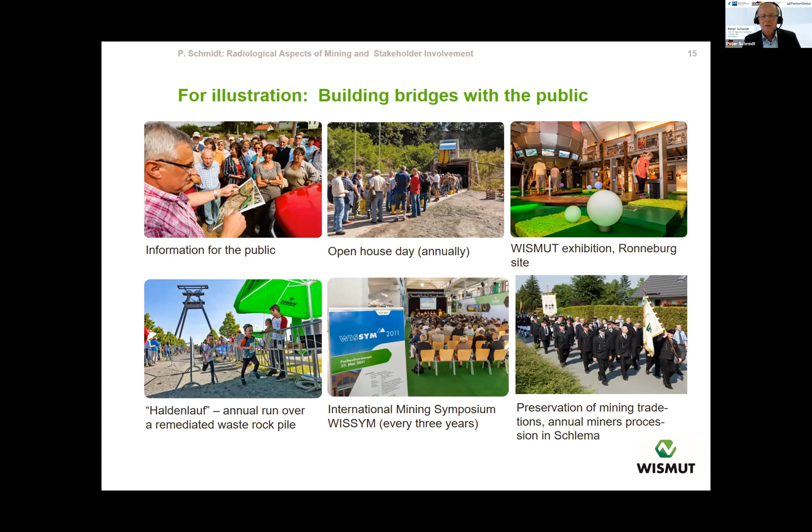And at this point, building bridges with the public, this is perhaps one of the biggest success stories which we can demonstrate to the public worldwide.

So with that, I'm coming to the end already. Thank you very much for your kind attention, and I kept to time. It would be nice if there are one or two questions. Thank you.